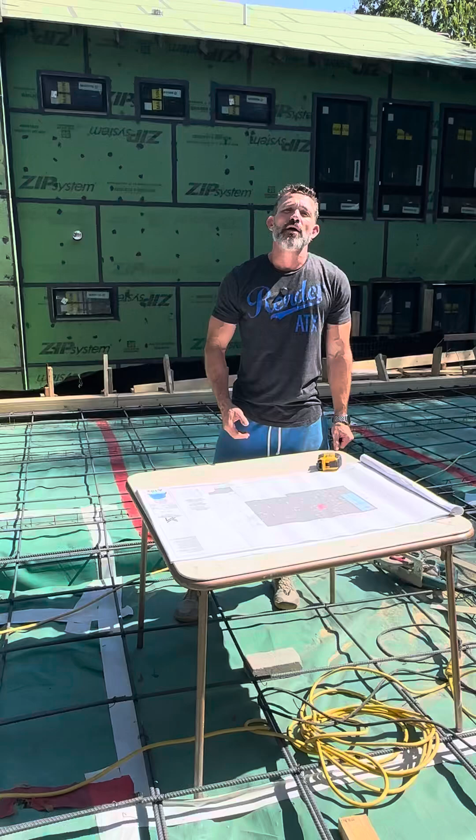Before we do, we're doing one final check and balance of all the items penetrating up out of the slab. So we've got things like plumbing pipes, electrical, and some slab drops.

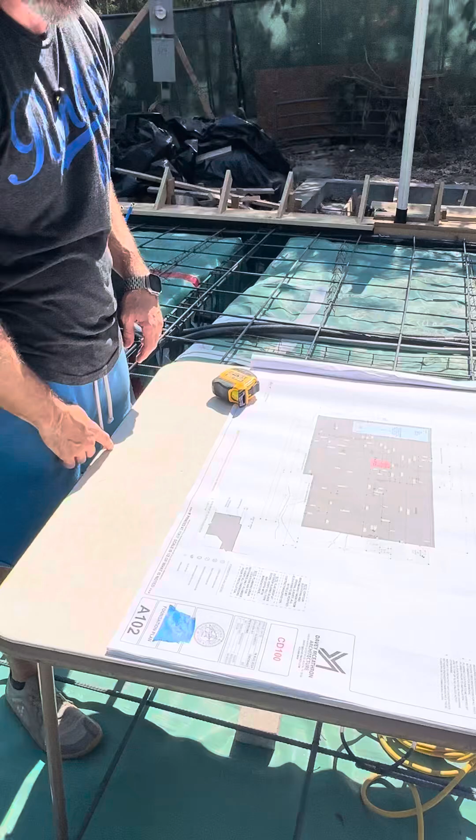Come take a look at these really awesome plans. This is a foundation plan, A102, part of our plans by Davey McEathron Architecture. They are incredible, and their foundation plans are exquisite because they lay out toilet drain rough-in, sink drain rough-in, shower and tub drain rough-in, washer drain rough-in, slab drop, and area drain.

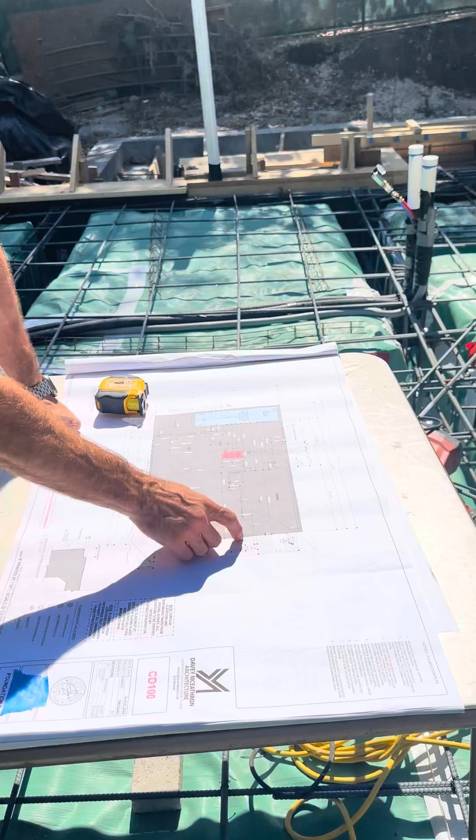So a slab drop is going to look like this. We've got one right here. We have a sill that says 1.5 inches, so that's going to be an 1.5 inch drop right there. We've got another visitable sill, and this one doesn't show 1.5 inches, so we're actually going to drop this one at 1/2 inch, just a straight 1/2 inch.

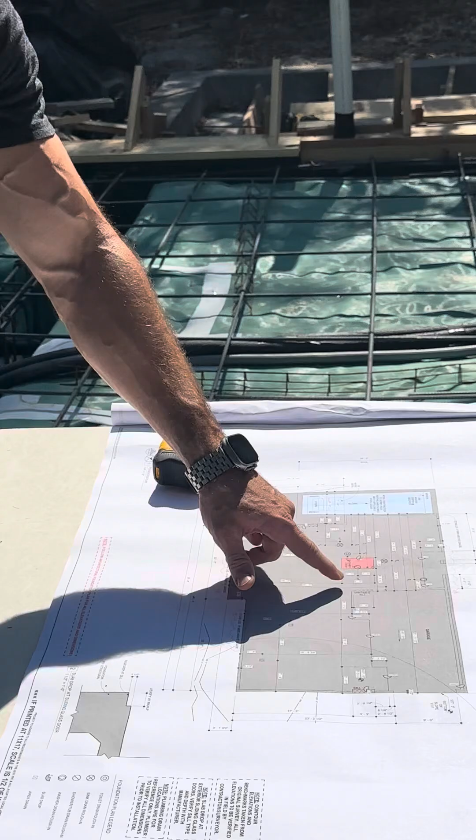This is going to have a little ramp from the garage to the foundation itself, and we can't have more than about a 1/2 inch variance on the threshold, so we had to do something particular there. And then we've got a nice drop right here for a big sliding door in the back, and it shows 1.5 inch. That's the typical slab drop dimension you do.

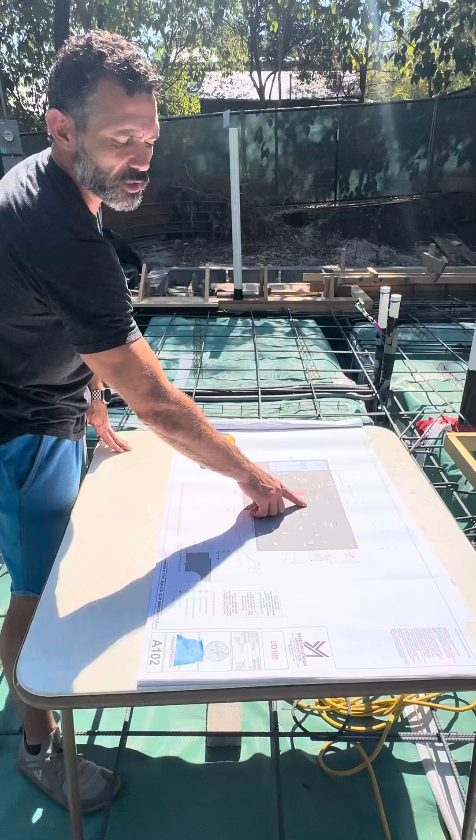If you ever need to backfill that, you just put a little bit of concrete in there and float it back up to exactly what you want. That's what I'll be doing, for example, with this 1/2 inch drop here—I'll be floating it probably another 1/4 inch later to get it just perfect.

So we're also doing Termimesh today. This gentleman right here is about to install Termimesh—a nice fabric of metal that will wrap in gasket fashion around all these penetrations, like this pipe. It will all get encased in concrete, and that will prevent critters from crawling up our pipes and into our walls and eating them up in the future.

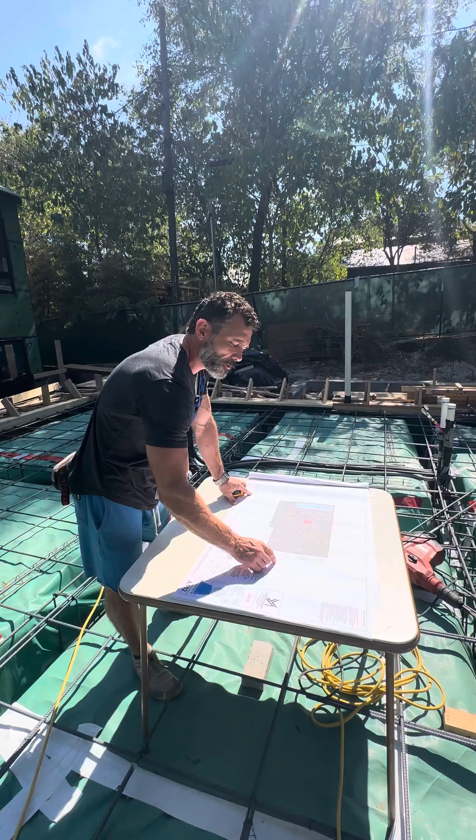So I'm able to look at these slab drops here with the nice dimensions—again, thank you Davey McEathron and Bailey for your hard work here. I can see I've got 17 foot 3 inches from the outside of my foundation to the beginning of my slab drop over here. So I'm going to walk over and check if I have 17.3 from the outside to in.

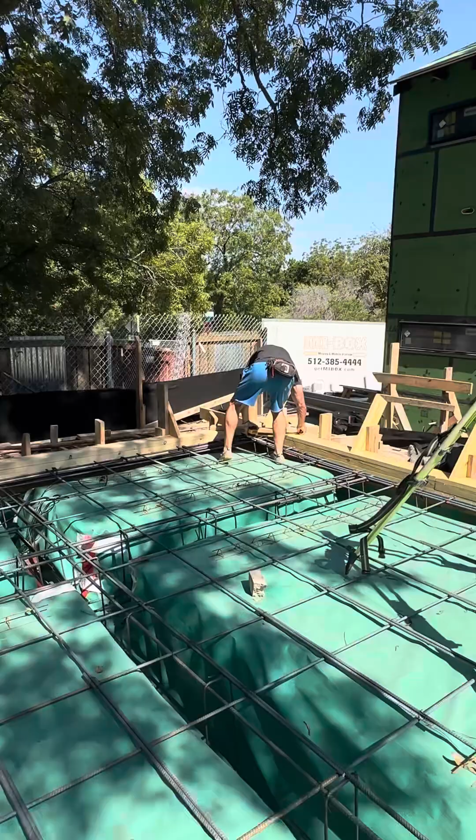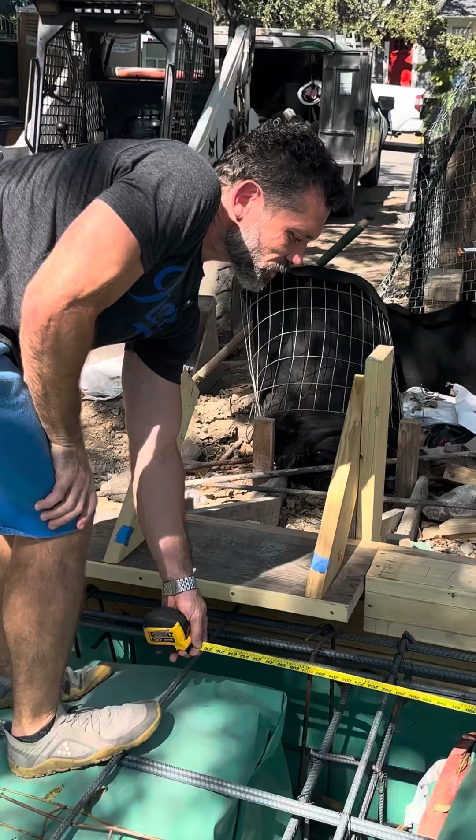Here we go. What did I say, guys? 17.3? Come here, let me show you how good this foundation team is. 17.3, guys, this is exactly what we have. This is our slab drop, 1.5 inches, and we nailed it. So that's what we're going to do with all these penetrations.

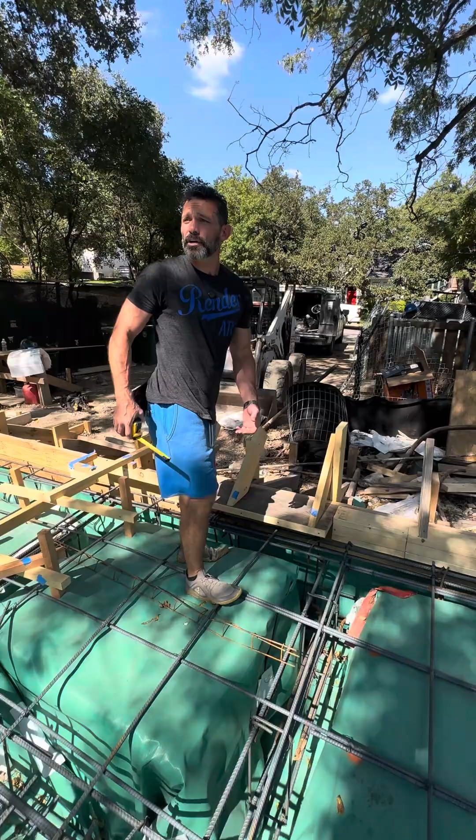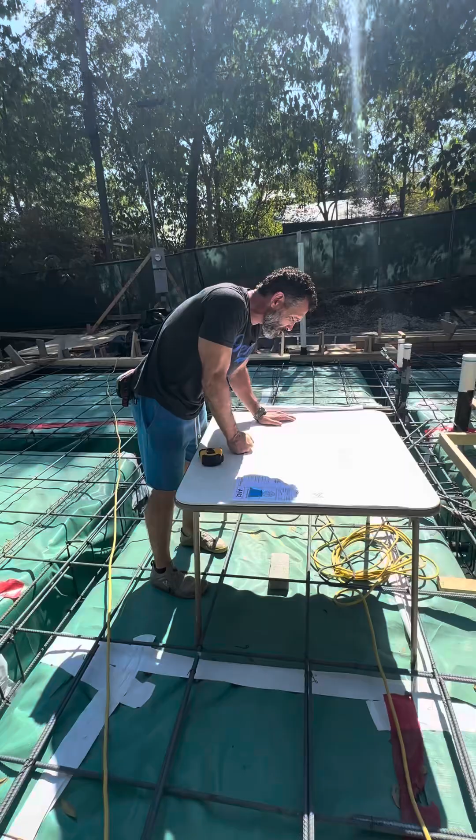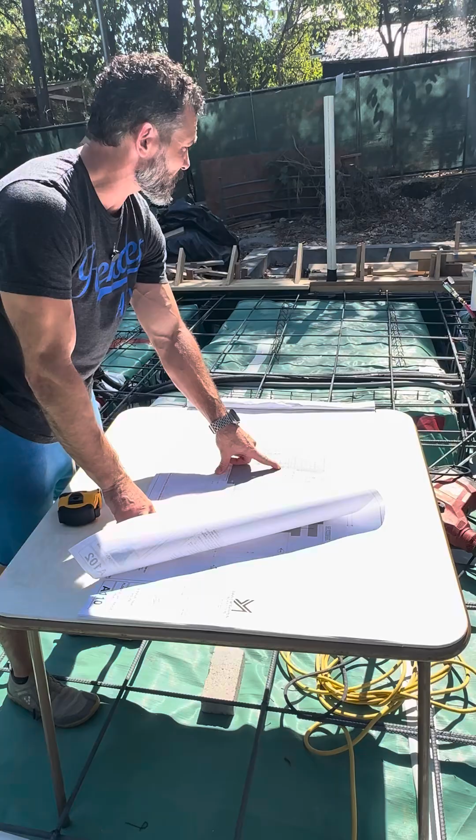Let's cruise over and check out another one. And I'm not having to scale anything because these dimensions are already laid out for me. So I'm going with the toilet drain rough-in right here: 20 foot 2.5 inches from the outside of my foundation to the center of this toilet rough-in, adjacent to the shower drop.

So that's going to be this toilet rough-in right here. We're going for 20 foot 2.5 inches, guys. Let me check that out and see if I've got it.

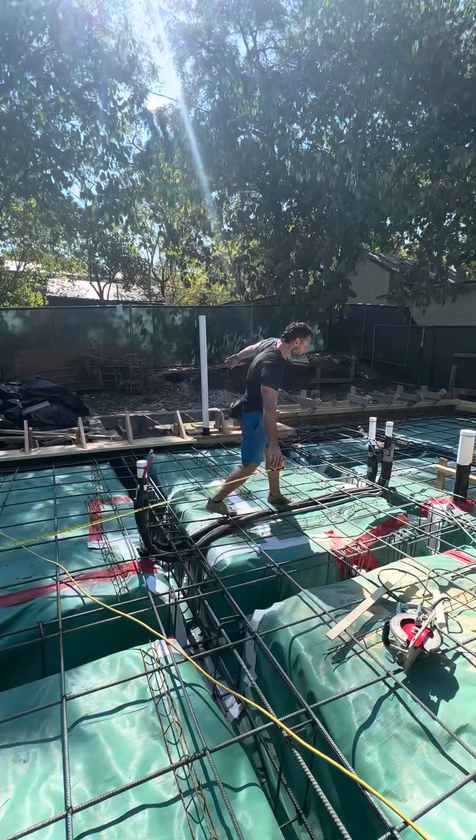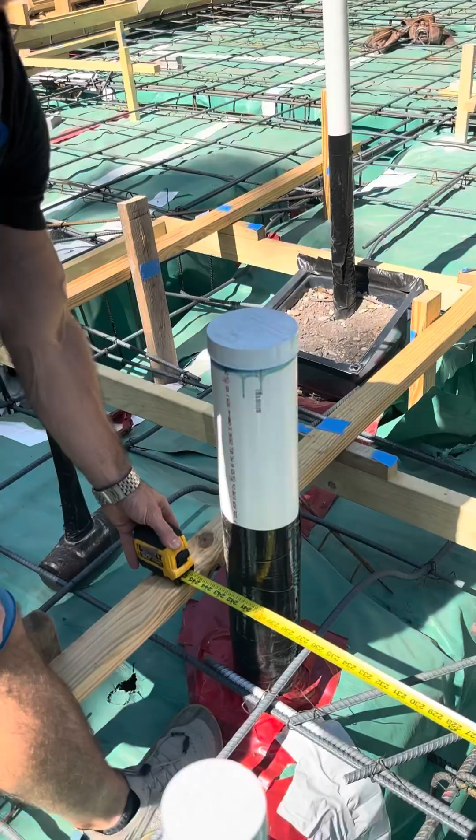Okay, so guys, I've got 20 foot 2 and 1/4 inches, so I'm 1/4 off. I can also see my tape is kind of crooked, so maybe if I fix my tape up I'll get it. Let's see.

20 foot 2.5 right here. Okay, so I'm off by about 1/8 of an inch. You know what, guys, I'm going to let that slide—it's no big deal, we can play with that flange just slightly, not going to be a problem. That one's in a good place. So let me go get my tape back.

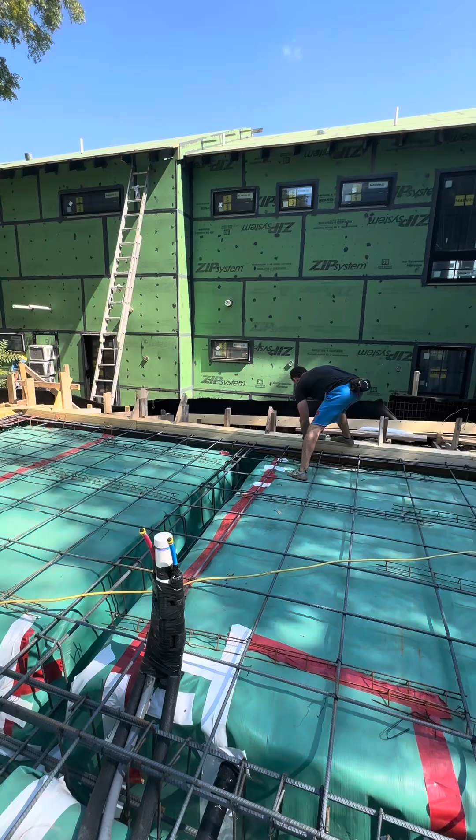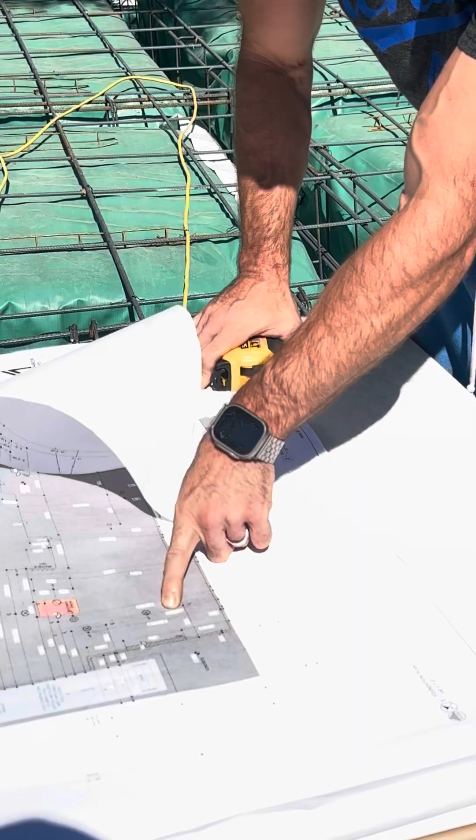And verify another one. So what else we got going? We've got this one right here—what's my dimension? 10 foot 4 inches to my sink drain rough-in. So, 10 foot 4 and 1/4 inches, sink drain rough-in. And that looks like that's going to be this guy right here.

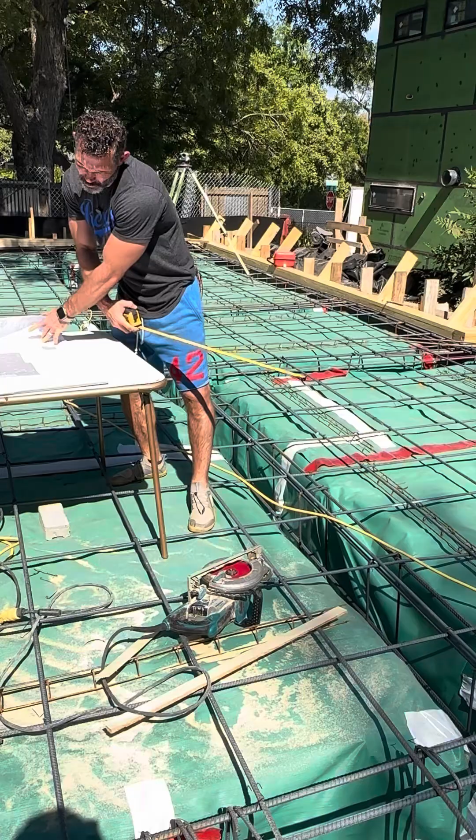10 foot 4 and 1/4 inches, this guy. So let's check that out.

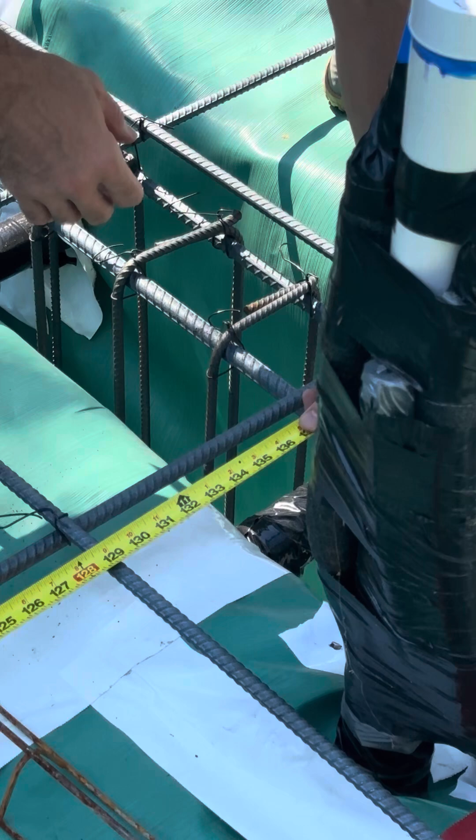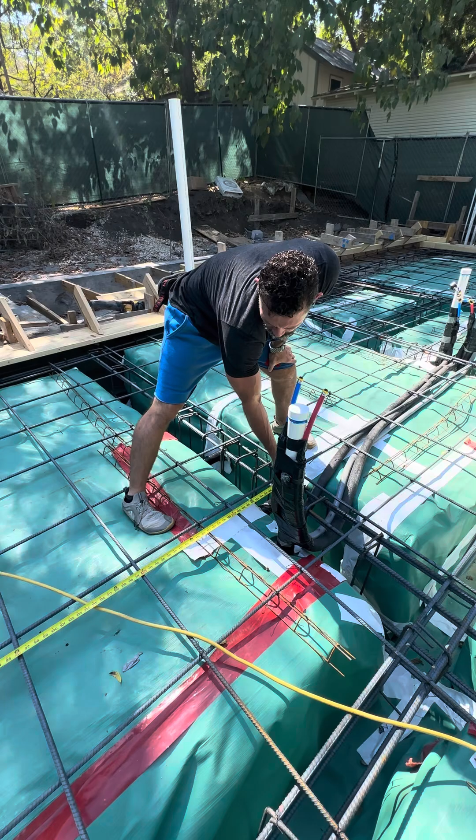Okay, 10'4¼ sink drain rough in. And this one is not really looking right to me. So I'm actually questioning this right now. You know, we may have to do something different. Sink drain rough in, let's see.

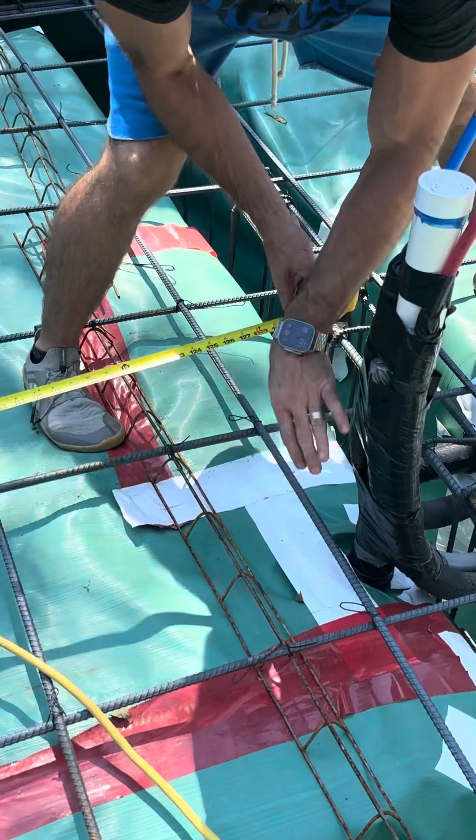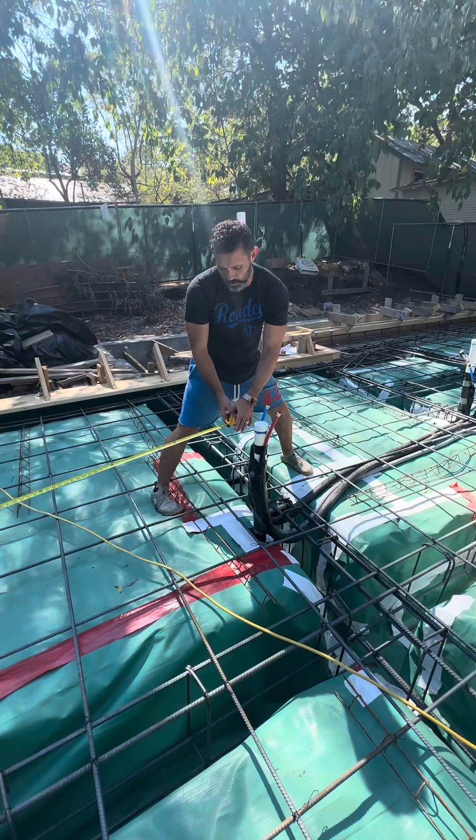10'4¼, so I have it going right here. This is right here. I'm gonna have to look at the plans and see if this is an island and how much play I have. It might be fine, but this needs to be double checked and verified, because we have a difference of about 6 inches. It might be all good, but it needs a little extra verification to understand how it's gonna work within the kitchen cabinet here.

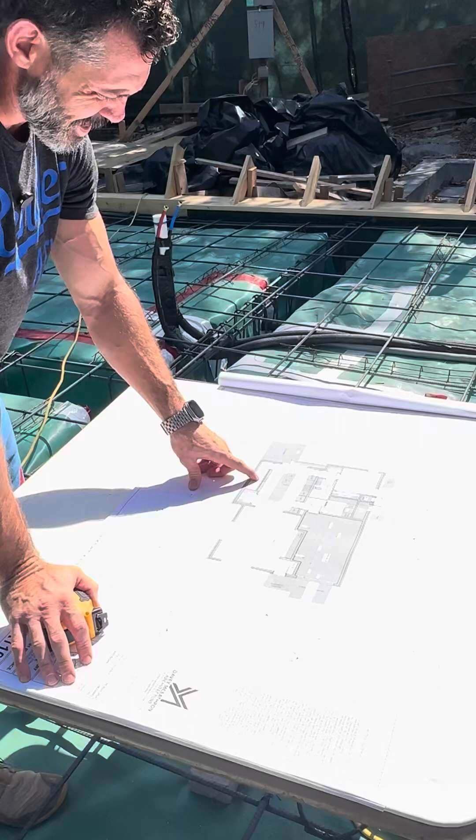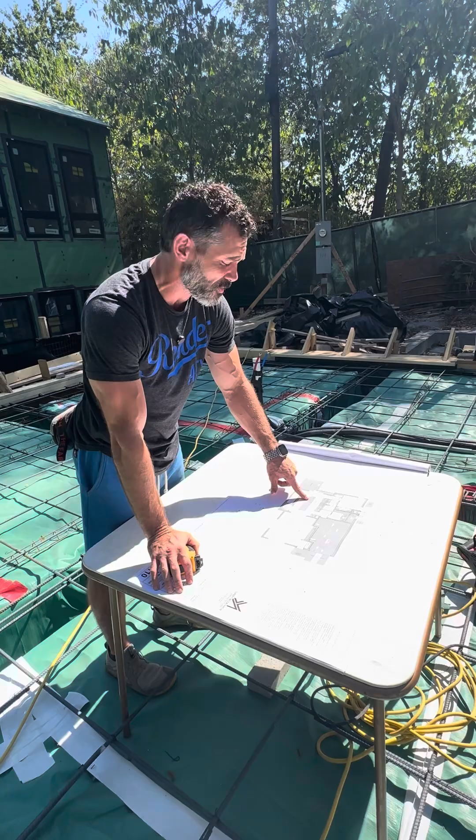So let's check that out. All right, so basically I've got it going right here, and you know, guys, it'll probably work, but because I've got this big table and island and piece of cabinetry, and I'm just a little bit further over, my plumbers might have done the right thing. But again, we're gonna triple verify this now just to make sure we don't mess that up. But those are the type of things we're gonna find when we do this practice.

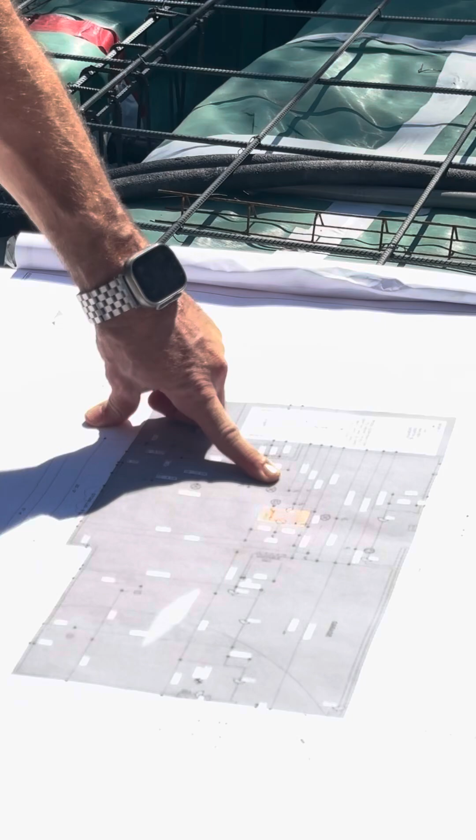Let's do one more together, something again nearby. Let's go this guy right here. So this one, again guys, go to your legend, sink drain rough in. Let's refer to that one. 18 feet, 11 and 1/4 inches, sink drain rough in. And we know we had something different on the last one.

So we want to make sure the plumbers didn't misinterpret the brick ledge and start from the inside of it or something like that. But we're going to verify with the other one, and that might give us some good information here. So 18 foot, 11 and 1/4 inches to this bundle right here. 18 foot, 11 and 1/4. Okay.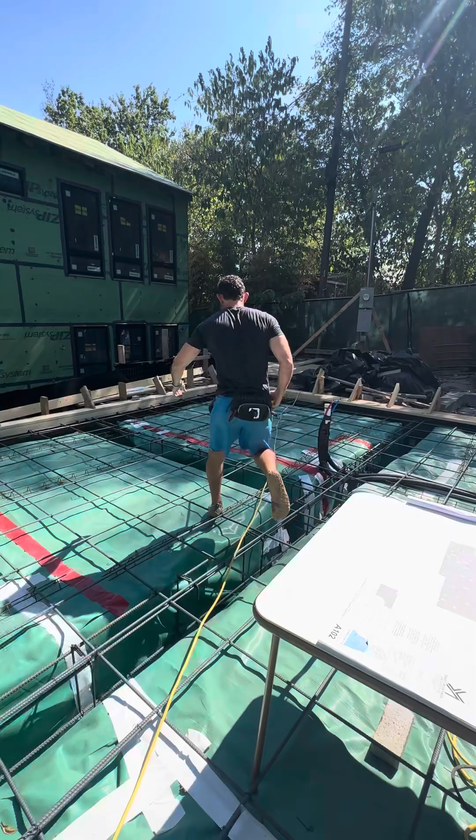And the reason why, guys, we're trying to do all this stuff so diligently is because this application of a foundation is literally set in stone once you do it, and you have to end up jackhammering stuff to fix it. We don't want to have to do any of that. Okay, so I've got 18 foot, 11 and 1/4, all perfect. It's exactly what we wanted.

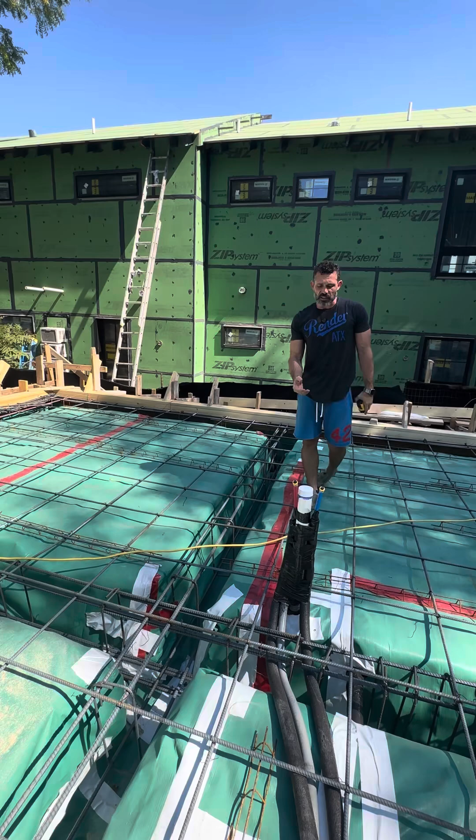This one's just right. So really, guys, I just need to verify the other one now, and I'm gonna reach out, contact my plumber. I'm going to look at all my plans more closely for this one. Everything else is looking perfect, but we're going to jump on that one and make sure we're in a good situation and that it does not need to be moved over 6 inches. Which way would it be? Let me look at it again.

So we're gonna look at this one more time. 10 foot, 4¼, because this one obviously is giving us some issues. And you're like, why? I mean, 10 foot, 4¼, why is it doing that? 10 foot, 4¼. Okay, 10 foot, 4¼ is right here. So the mark I have where it should be is right here. And it is right here.

So I'm going to move this now and see how much this is off by. 5.5 inches is our brick ledge. So let's see if it happens to be off by like 5.5 inches, because that could be an easy mistake. And, you know, it's off by about 6 inches. So maybe that is the case.

So the plumber, who's awesome, fantastic plumber, is going to be getting a call. And we're just going to go over and verify that this guy does not need to be right here, and that we're safe right here. I think because we're in that cabinet space, we're going to be just fine, but we're going to verify. So anyway, y'all kind of get the idea.

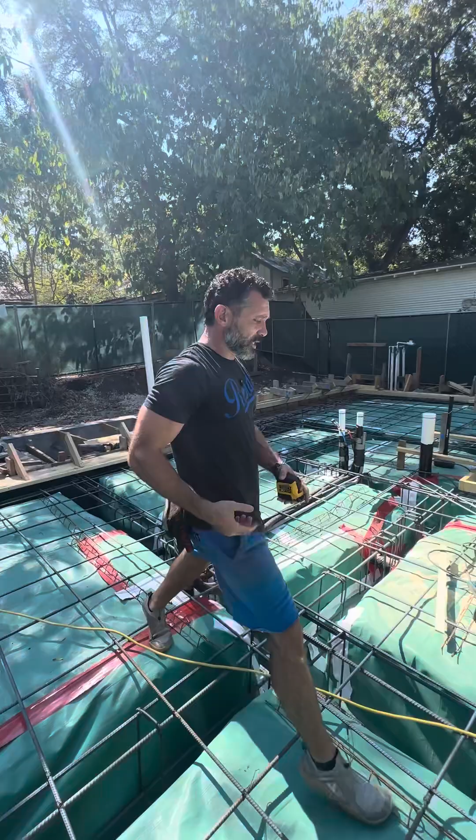You've got the legend, you've got the drops, you've got all of the items on the legend, mostly plumbing stuff. And you just got to walk off and make sure everything's in its right spot. And then you're doing your job, making sure you're not going to end up having to jackhammer stuff out later because you didn't do your job well. So I hope that helps you all out there.